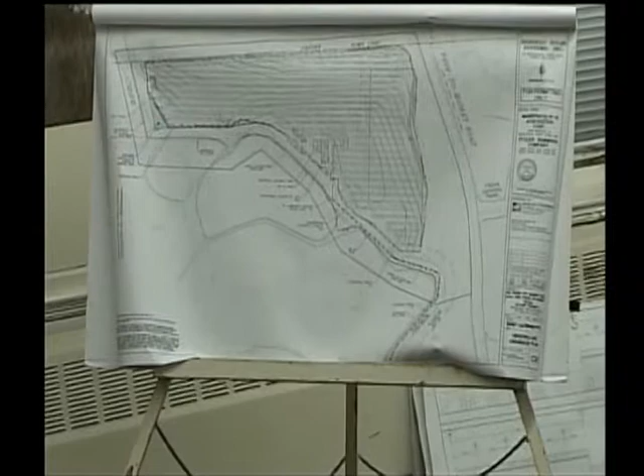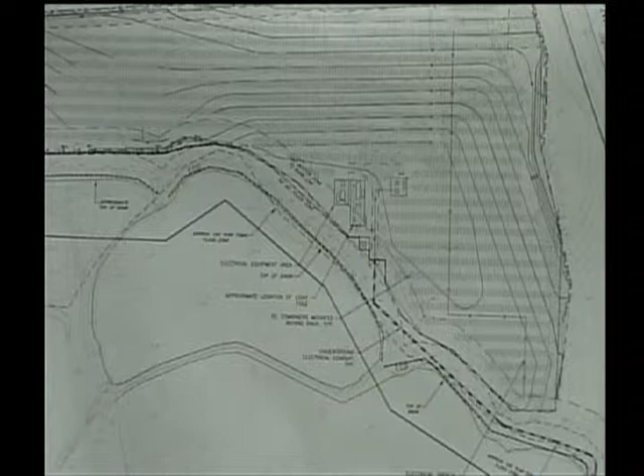The other aspect of the 50-foot no touch, which may come into play based on Mr. Rowley's comments, is that for the equipment area in the south central portion of the site, there's an existing agricultural access road, and I'll get up in a minute and point to this area, and we're proposing a gravel drive within the solar panel area. We hadn't proposed a formal connection between the two because it's drivable as is. If Mr. Rowley or the planning board require a formal connection, that is within the 50-foot no touch because it has to connect to the existing agricultural road. So that area is located here. So that's to be determined, but I wanted to mention it for the commission's information.

Jack, anything to add? No, I don't. Happy to answer any questions if the board has any. Ms. Bichette, you had a question? Yes, could you speak also to the issue of the battery component of this project? Sure. So the energy storage component of this project is not unlike the energy storage component of the 3 previous projects that were approved by this board in recent months. It is a lithium-ion battery that is basically a bolt-on to the solar project. To take a quick step back, solar obviously has become more and more prevalent throughout the Commonwealth of Massachusetts.

As we are building up renewable energy assets, one of the big issues is what's called intermittency. When the sun's not shining or the wind's not blowing and people need power, how do we get it? And vice versa, when there's plenty of power to be produced and there's not a lot of load, what happens to those electrons? So energy storage has long been a perfect partner to renewable energy.

And with the opening of the SMART Incentive Program, which is the successor program to the SREC program, there is a section that helps with energy storage as a component of the PV system. Now, practically speaking, the energy storage is viewed as ancillary to the solar project, helping it interact with the grid, helping it interact with the functionality of the system itself.

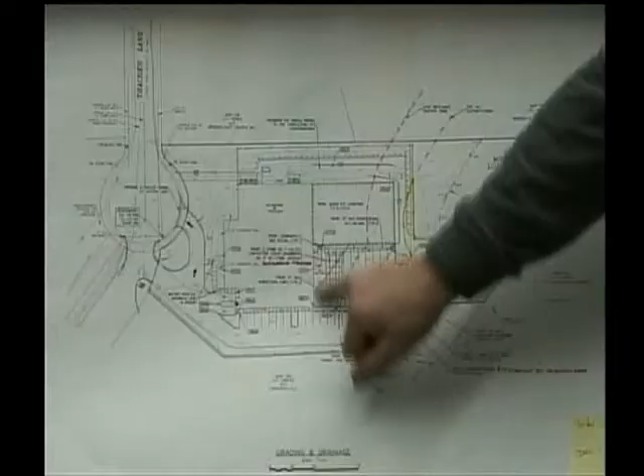There's lines with squares on them, is that it? No, outside, keep going. In the 50-footer. The erosion control and the fence basically are the two lines I think she's looking at. At the top of the plan. Keep going. To your right. Right there, got it. The one with the square is the erosion control barrier, and the one with the circle is the fence.

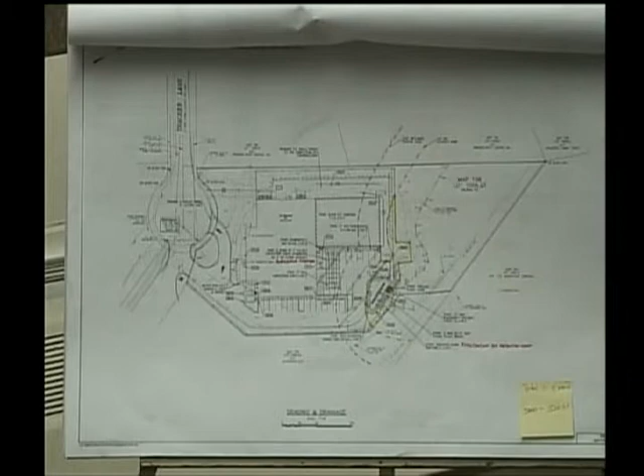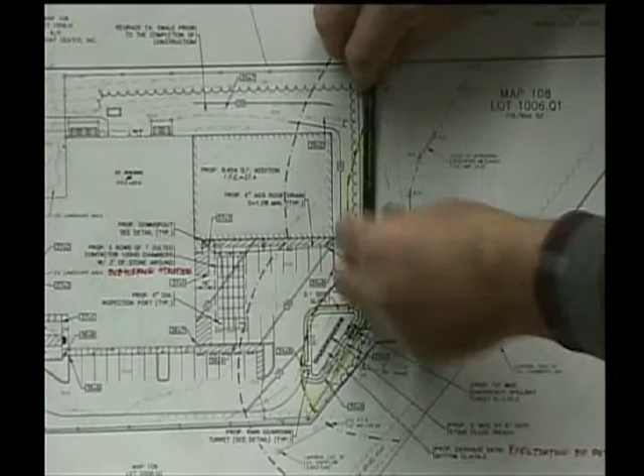Correct. Now, where I see the fence where your finger was just, how many trees will be cut from there to the top of the lot line? Because that fence was quite a bit into the forested area. There will be some clearing, right? Yes. It's about 100 feet from here to here. Actually, the clearing is shown by that clouded area. Okay, so it would be cleared back to the clouded area? Right to here. Okay. Darn.

Any more questions from the board? I still think I'd rather see some erosion control, some drainage control.

Excuse me, I'm diabetic. He needs to get his sugar up.

...than to leave it the way it is, and looking at what you're proposing here with the added drainage and everything that you're doing, I think it is an improvement to the site. That site was developed way back when, quite a few years ago, so things have changed a little bit, and you are improving it. I don't see a problem with it myself. The fence is going to keep any debris from going in the wetland area. It's a plus, in my opinion.

Anybody in the audience want to speak for or against this project? I'm seeing none. Is everybody ready to vote? I'm ready. Before that, a motion to close the hearing? Okay, I make a motion to close the hearing. Second? All in favor? Aye. Opposed, abstained? Hearing is closed.